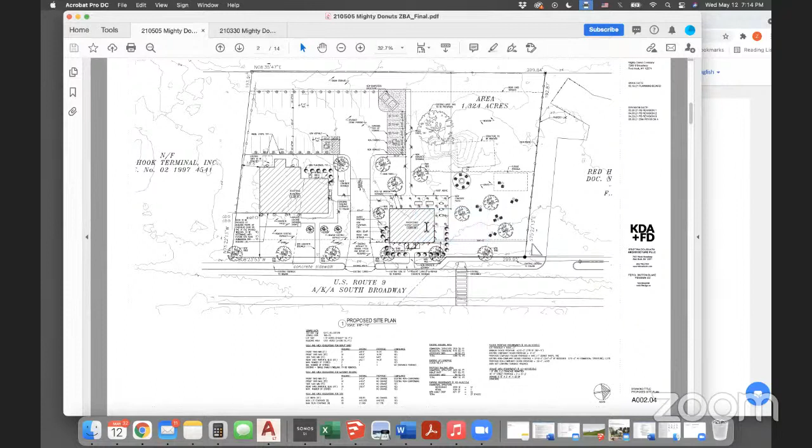So by moving the building over, we've allowed for more green space in this area. So if there were any future developments there, we haven't put the box in the middle, and so we've allowed for even more compliance, right?

We've added some street trees along the road, and a few small improvements to the Bottini building to increase our compliance with the intent of the TND district. Even though this existing building is a bit far back from the line, it is encouraging community interaction, not only here in front of the building, but also in this green space we're proposing that is right across from the Holy Cow. As we may have mentioned in a previous meeting, it's a great connection for the community, given the scene already around the Holy Cow building. So that's essentially the things that have changed since last time.

Let me know if you need anything else from us before the public speaks, Kate. Yeah, why can you not comply with the frontage and height requirements contained in the zoning code for this district, the traditional neighborhood district? Absolutely. So let me start with the frontage then.

The whole project really centers around a historic diner that we are bringing to the site. So that existing diner has a set width, and that's one key point. The other key point is that—how do I put this—as we discussed last time, as we make the building bigger, whether it be wider along the frontage or taller, which is touching on our second variance request for the stories...

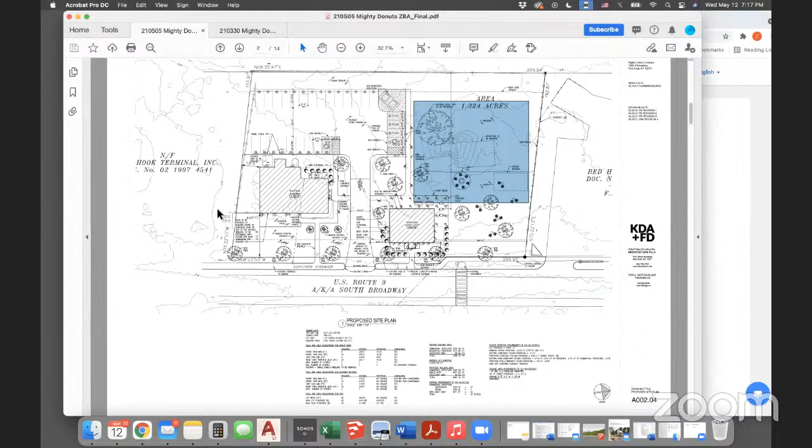So it just goes to show that the site, because of its physical dimensions, given its long frontage but limited depth, and the fact that we do not have access to municipal water and sewer, we are making an argument that this acts as a stepping stone for the TND district, given that not a lot of the TND district area has been developed in compliance with the zoning code as of yet. So we feel like, given the site constraints with parking and sewer, it constrains the size of our building. Also, our primary goal is to put this little beautiful diner on the site that our clients are in contract to purchase.

And thirdly, we have issues with the water and sewer. Certainly, if we had municipal water and sewer, we would have a much easier time fitting what we need to on the site. So for those reasons, we are requesting the zoning board issue the two requested variances.

I'm sorry, Zach, I didn't hear your first key point. What was your first key point?

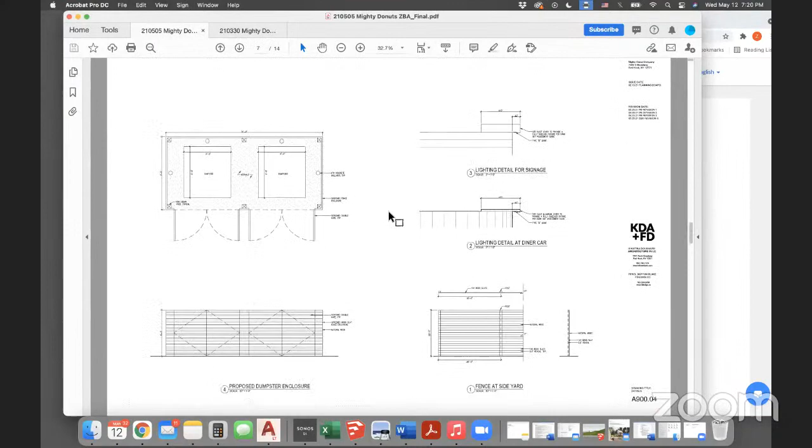That's roughly correct. And I would just add that this isn't a subjective, architects-being-stubborn kind of deal. This is a historic diner car that has set physical dimensions, and it's the intent of our clients to introduce this beautiful little diner into Red Hook. That's kind of the heart of the project to begin with.

Jim Hegstetter, do you have any questions or comments? It's not historic.

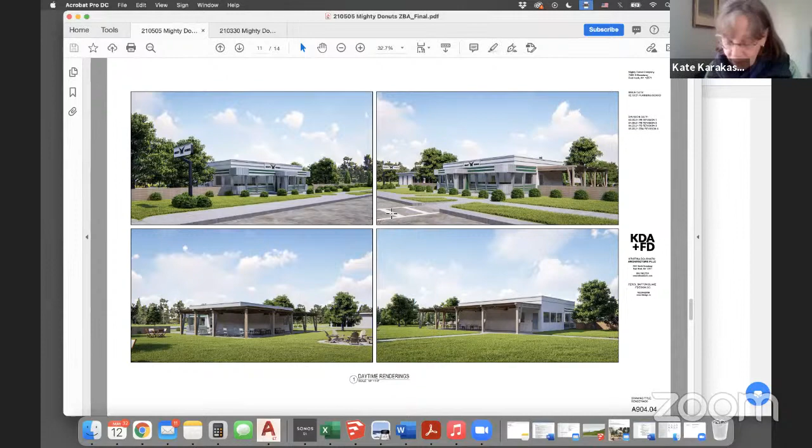No, wait, I'm just trying to manage my Zoom experience here. I'm having... Okay, we'll wait for you. I can't even get video. Jim, do you want Ann to send you the call-in number in case you need to call in? No, I have that. If I have to do that, I will, but this is intermittent. I can hear, but I just sometimes can't speak.

Okay, well, we were hearing you just now. If you have any comments or questions, I would really like to have your input here. I understand the limitations because it's a historic diner, and what the limitations are around changing the design. But the frontage is the thing I'm kind of concerned about, because I thought there would be a possibility of extending that, and I'm not sure what other alternatives there are, but I'm a little concerned with the limitations on limiting the frontage.

Okay. Zach, do you want to speak to that at all? Yes, I can speak to that.

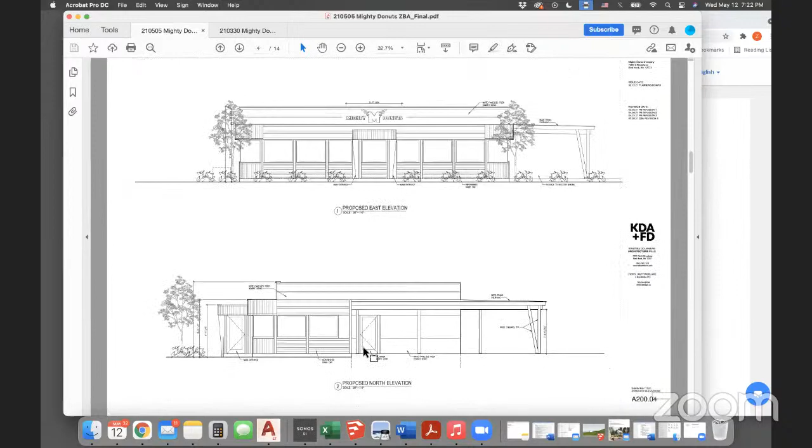I think though we do have architectural limitations, I want to again emphasize that we have site limitations, and making a bigger building just wouldn't work with the septic as well. I'll switch to the last page that has the previous septic design before we actually did perc tests, and I can assure you it's gotten larger than what we're showing here. So this is just to support what we have on the site right now. So you can only imagine if we started increasing this building by the almost 70% it would need, we just wouldn't be able to support that building on the site anyways.

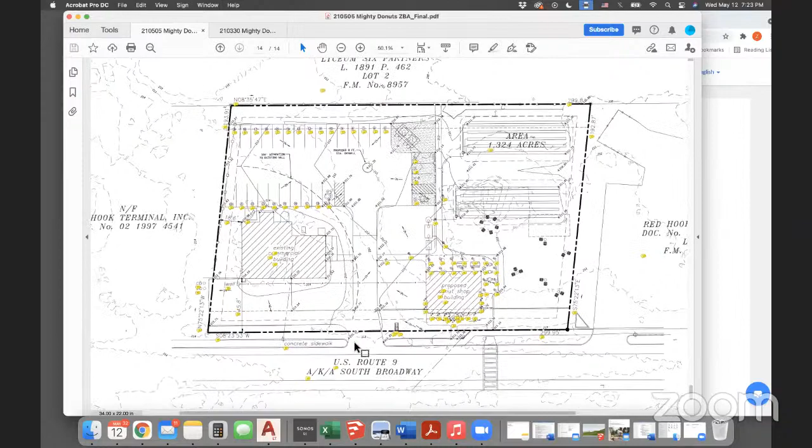So we're kind of in a place where, in my personal opinion, we're in the perfect place for a variance, because of the restrictions the zoning code, when it was overlaid historically, put on this site. So that would be my response to that.

Zach, I don't want to imagine anything here. You've just brought up the previous drawing that showed what the septic requirement was. Do you have a drawing showing what your new septic requirement is, and what the basis was for that?

Have you changed anything with respect to the initial drawing that you showed? I'm unclear. You have your donut shop, but the use of the Bottini building, I'm not sure what use you're supposing for that leads you to the requirements for the septic. I just feel I don't have enough information. You're saying now we've got new perc tests and even more than before we cannot meet the requirements because of the needs of our septic field, but you're not sure of figures or facts or anything to back up that assertion.

Understood, Kate. So we were advised not to present any materials that were not submitted to the zoning board. I would be more than happy to, and it was logical to me, to present the newest and latest materials. So if that is okay with the zoning board, I will ask Ayaka if you could message me or email me over the newest

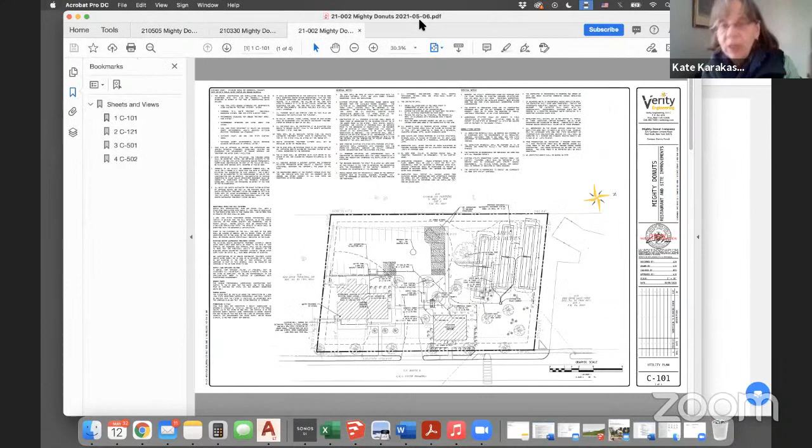So Zach, what I want to say is I do appreciate that you are answering to many masters at this point. I would encourage you to look at the ZBA - we are distinct, we have different remits, we're looking at different things. So I would encourage you to treat each as separate reviewing bodies. And I would just say I appreciate that this is difficult for the applicant. We appreciate the understanding, Kate, and I just wanted to make it clear that it was the ZBA that asked us not to present materials that haven't been submitted.

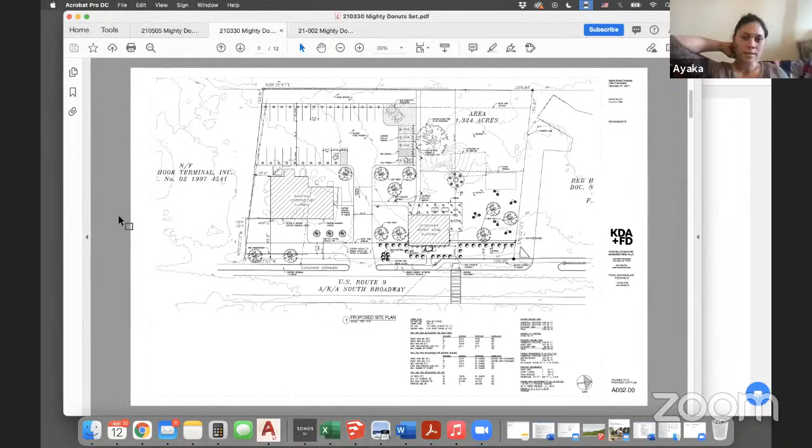Am I right, Ayaka? Yeah, the planning board has received the latest engineering drawings, but we received this right after we submitted to the ZBA, so the ZBA hasn't had a chance to review it yet. Okay, I understand the problem.

Okay, so since we are going to be moving into June now, we'll have an opportunity to get those documents and any supporting information. The more detailed you can be about why - basically we want to know what were the suppositions that you made, on what are you basing these statements that now you cannot comply with septic, and that you need this amount of room, and to show us the drawings. So yeah, I can talk to that.

Okay, and if I may, Kate, the real change that has exacerbated this problem has been the recent percolation tests that we performed. So before, we were using design standards based off of assumptions. And to remind everybody, at the last meeting we were assured that the soils are very good on this site. I just want to make it clear that they are not good, and the perc test did not go well. So that really, and we've been working - our clients have been paying for all these iterations - working really hard to show the actual septic system that we would have to put in.

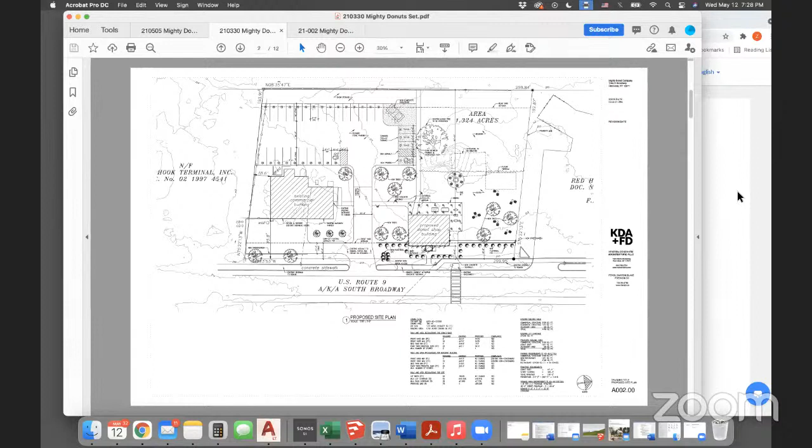And to answer the other question, our clients aren't wedded to having a retail space and a restaurant in the Bottini building, but we are caught in a bit of a chicken and egg situation, because the planning board is looking for us to plan for parking and septic. So we are using the most stringent planning use permitted in the commercial building, so that the eventuality of any tenant coming in could be planned for. But that therefore shoots us in the foot when we come back to the ZBA and start talking about our septic system. So we're not wedded to any retail or restaurant use - we're really just wanting anybody to come in and take care of this building for us. That's really the Bottini building I'm talking about. Okay, so I'll leave it there.

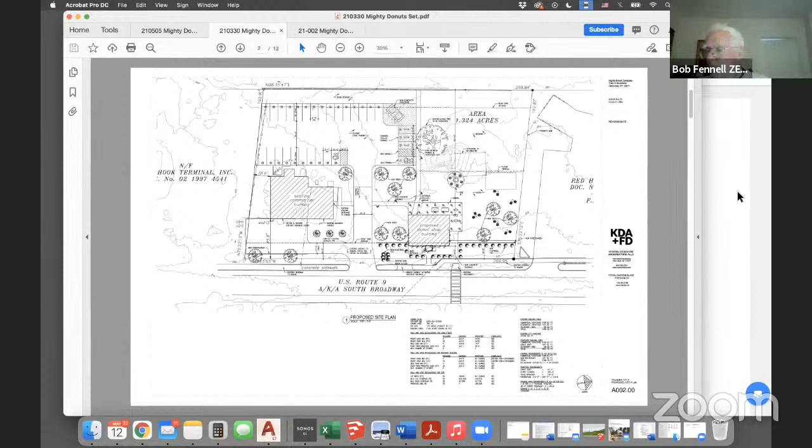Okay, so I understand, and it sounds like you get the issue here. For the ZBA, we would be looking at the most conservative uses - office uses, the minimum - because if your argument is that no building can go onto this site and therefore a variance should be granted, don't go there. The logic is you show us some very conservative uses, the least that would satisfy the zoning requirements. How far can you get towards satisfying the zoning requirements while still managing the parking and the septic?

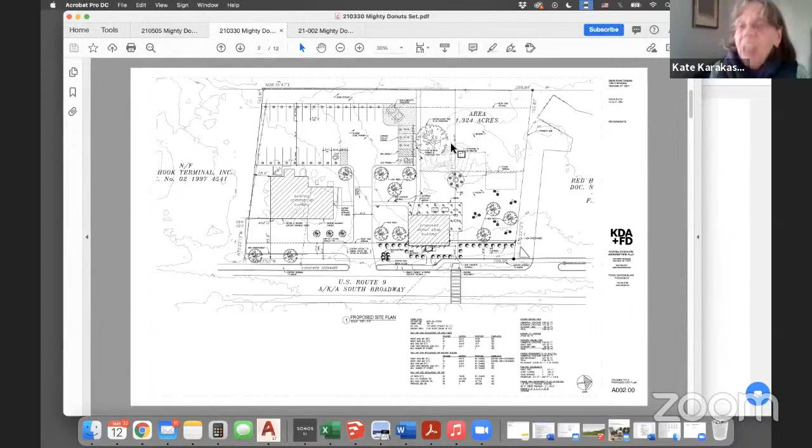And the fact that there is no definite use plan for the Bettini, and that you apparently have no plans to alter Bettini or raise Bettini as you do the house. There are many permutations, many possibilities, and none have been examined before the ZBA to show us that nothing is possible. If you see my point.

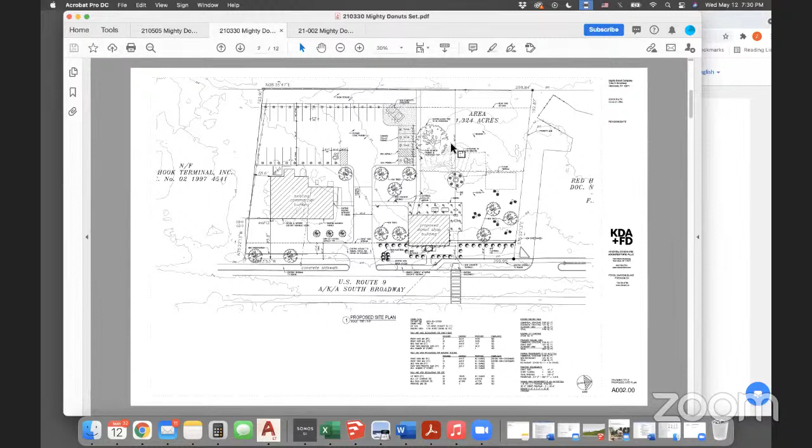Yeah, and I wonder if I may make the argument that since we first made the submission, we looked at the frontage requirements, and it became clear to me that the existing site has no frontage that is in compliance with the TND district. So one of my arguments is that what we are proposing is 40 feet of compliant frontage versus 0. I thought that was a fairly good argument, and again, it's a stepping stone towards where the TND wants to be. So I'll leave it there.

Chris Carney, do you have any questions or comments at this time? Yeah, I actually had one question. I heard a while back that the proposed building, the rail car, was going to be moved 20 feet to the left. Is that correct? To the south? Yes. And what was the reason for that again?

So would you like me to speak to that, Kate? Yes, Zach, please. Okay, so the reason is twofold. One of them being that the planning board and the Dutchess County planning department also asked us to move the building to the left to provide more green space towards the north for future development.

Okay, got it. And Chris, because the Dutchess County Planning Department presented this as a condition to granting the variance, that means that the New York State General Municipal Law kicks in. And in order for the ZBA to grant the variance, we would have to do so by a vote of 4, that is all the members of the board now. And if they move it 20 feet to the south, then they would only require 3 votes to get that variance. Oh, I see, okay. So there's a real practical concern for them too. Yep.

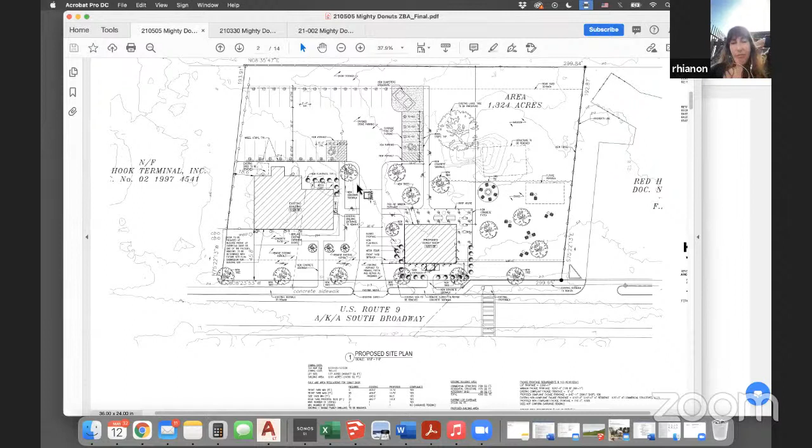I don't think we have any intentions to move. I have no personal intention of moving the diner. We did move it south to make room so we could have completely compliant development, should sewer come in on the other side of it, which I think actually would make a nice transition. But our intention is not to move it. Yeah, I mean it has had a peripatetic history up to now.

Yes, so I just want to, right, but you're not going to do any structural changes or anything that would prevent it from being moved or operated in another site, is that correct? No, well, yes, that's correct. Kate, I mean these things are relocatable, but at significant expense. I imagine so. And we will be acquiring the property here. So just in the hypothetical that it does not go well, and there is a more productive use for the property, we can make the decision at that time. But there are no plans to move it.

Okay, and do you have any plans, have you thought at all about developing the property to the north of the donut shop over time? To the north, you mean within the site, the area of the property to the north? Yes. Yeah, so the significant restriction there is site capacity for required infrastructure, parking, wastewater facilities. The wastewater treatment septic field there occupies a great deal of the site, to the extent that without a municipal sewer system we probably could not develop additional square footage on that site.

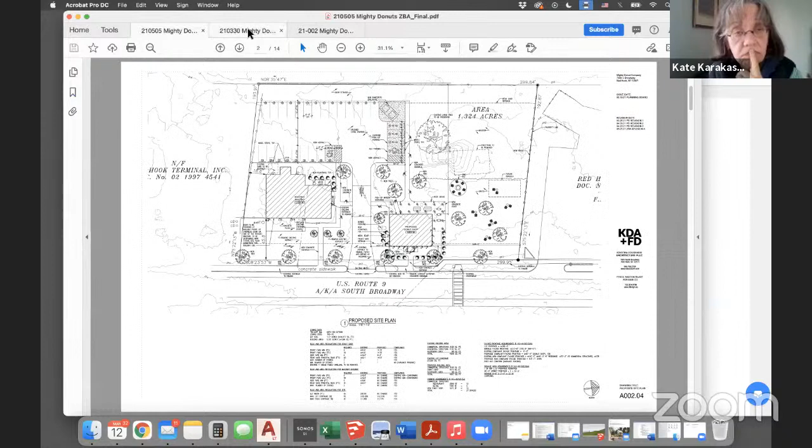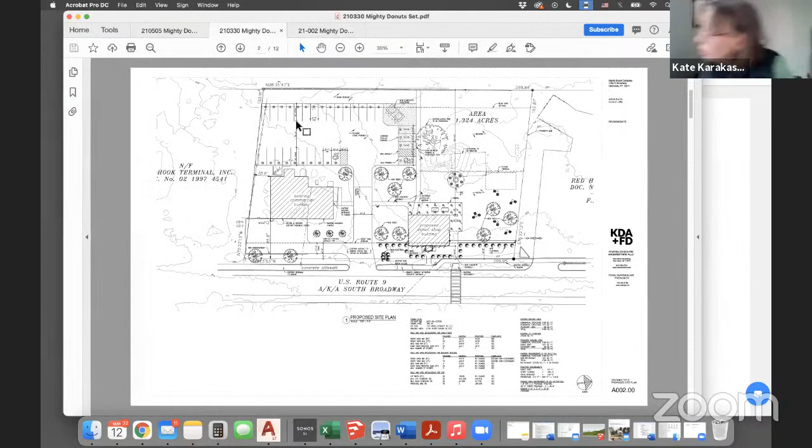Are you talking about from this time to last time? I went from 002.00 to 002.04. You've got 29 parking spaces on 002.00—that was the first drawing, I believe, March 30th. Then when you get to the 4th, on May 5th, now we've lost 2 parking spaces.

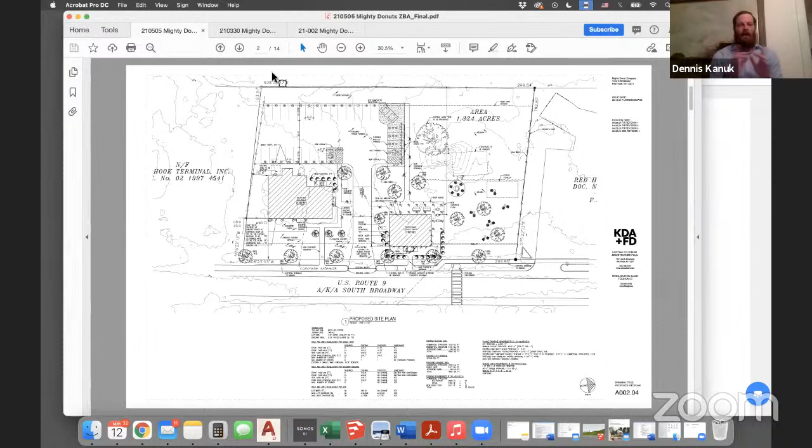I'm just wondering. I can actually answer that. So Kate, I think in the iteration you're referring to with the 2 extra spaces, that was for parking the existing Bottini building at full restaurant use. We've since revised the potential future uses of that space, splitting it into a maximum development of either 2,000 square feet of restaurant and 1,000 square feet of retail—that's the division shown in the blue area.

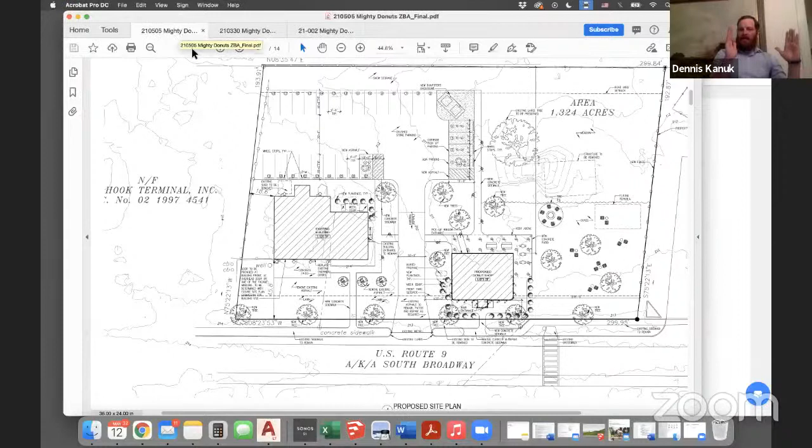Yeah, I think another reason for this—correct me if I'm wrong—is that the total length of the parking lot across the site had to be moved south slightly to accommodate the septic field. Yeah, that's exactly what I was going to say. Unfortunately, the drawings don't have measurements that would allow us to quickly verify that.

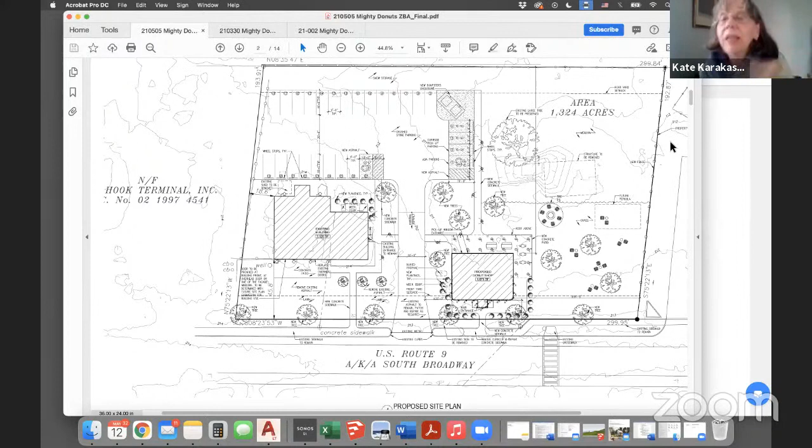So anyway, that question is outstanding. I'll just say I still don't feel I got an answer, but we've got another meeting and you have a month, so please— okay, I'm looking forward to being educated.

Just so we understand, how firm are these parking requirements? Obviously we're wanting to get through this process as quickly as possible, and we understand the SEQR isn't in. So I was going to ask if there's any way to do conditional approval tonight, but I'm assuming the answer is going to be no. The answer is no. Okay, so I just wanted to get past that.

That being said, we're really going to be shooting for some kind of vote at the next meeting if at all possible. I don't know, Dennis, if you want to get into this, but being under contract with the land, we're having a huge time crunch—which is obviously our problem, not the board's—but we're really just trying to get the project launched. So we're asking if there's any possible way the ZBA might consider a special meeting after the septic determination by the planning board.

Do you expect to get that before the June meeting? The septic determination? Sam Phelan is here—he could probably speak to that.

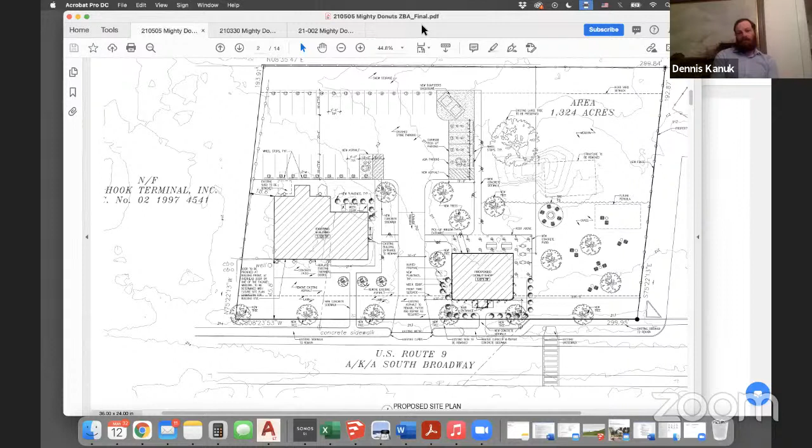Okay. Mr. Cole, does that answer your question? Yes, it does sort of answer my question.

It seems like if we're looking for a variance for this building, now that they've identified what it's going to be, I don't think that fits in with the master plan. I'm upset because we've had a lot of time put into developing what this town's going to look like, and with this community concept, the very first thing we see is a request to change it—it smacks in the face of everything that's been happening in this community for the past number of years.

It's nice that you have children in the school district—I think that's wonderful—but just because you have children here doesn't mean you have to put the project here. It's a portable building, it can go anywhere. I think everything they're doing is planning on using the Bottini building as a revenue source rather than the donut shop.

One last thing about the Bottini building—I know environmental compliance with the SEQR process was mentioned earlier. What about contamination in the ground underneath this Bottini garage? Who knows what's been going on there for the past number of years? Do we know that's a secure and environmentally sound site?

Okay, thank you, Mr. Cole, for allowing me to speak. Certainly. Okay, and Mr. Harkins.

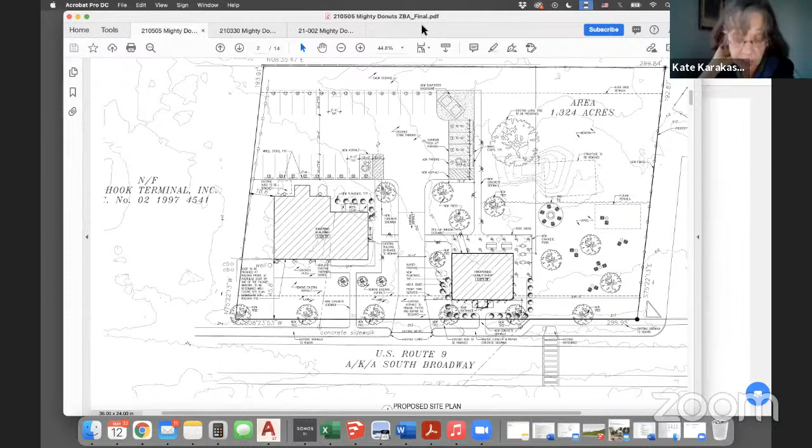Since she'll have the opportunity to speak at the next meeting, I think we should, or submit written comments too. Why don't we suspend the public hearing at this time? Victoria, we don't need to have a motion to continue, do we? We do need a motion to continue it to a specific time.

And before you do that, I do want to remind the board that there are certain standards they need to apply when considering a variance. We have to go through the balancing test, and you have to weigh the benefit to the applicant versus the detriment to the community. There was a statement made about having to be a significant benefit to the community, and that's just not the right standard. I want to remind the board that when the time comes, you have to apply your statutory standards. Thank you.

Okay, Kate, so can I add? Is this Zach? Yes, sorry. Good, I just wanted to, recognition, if just real quickly, and I know we have another public hearing to deal with, but I just wanted to ask one question, and this is really for Sam and Stephen.

I totally understand the 200 meetings that were put into doing the TND district. I just have a question. One of them is, when was the TND district established? By my estimation, I would say 15 to 20 years ago. Do we have an answer to that?

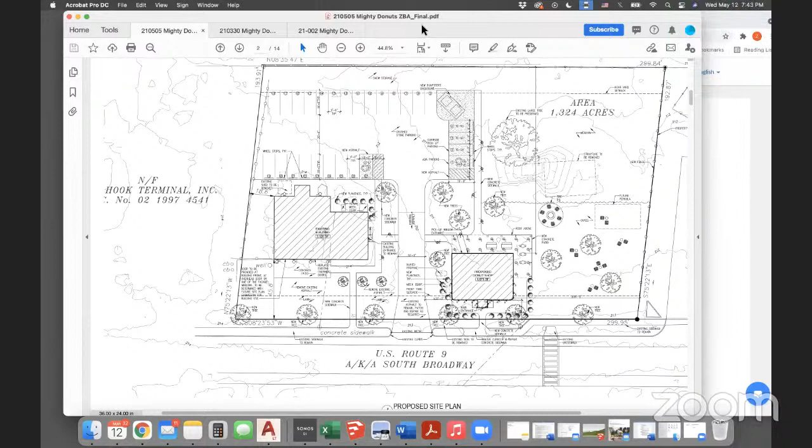Thank you all who commented. Not closed, just continued, I'm sorry. Thank you, Anne. It is to be continued to the June 9th meeting, starting at 7 p.m.

I'm sorry, Kate, what was the date of the next meeting? June 9th. June 9th at 7? Yes, okay, thank you very much. And we will hear Luciana at that meeting.

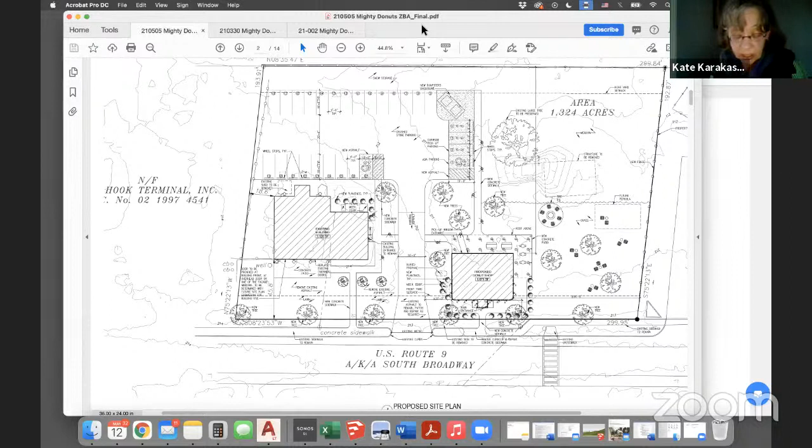And I would ask the board members to hang on so we can have a brief discussion about a policy for the length of the meetings. Zach, could you stop sharing your screen, please? Yeah, great, thank you.